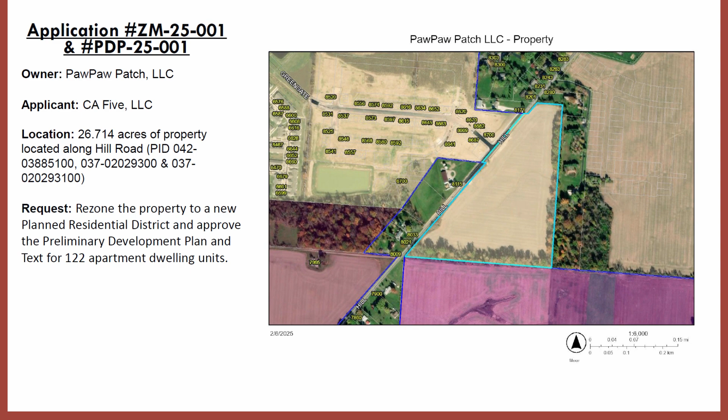So I'll go over those with the commission. As a brief reminder, this property is currently zoned PRD. It is part of an active development that was approved in 2001 for the Greengate Piper development tract.

This tract was originally approved for an assisted living facility and 44 independent detached condos. The applicant is requesting to rezone this property to allow 122 apartment dwelling units. This parcel is approximately 25 acres plus some right-of-way along Hill Road, totaling approximately 26.7 acres. Again, the applicant is requesting to rezone the site to a new PRD that allows for 122 apartment dwelling units.

When looking at the updated site plan, the applicant has not changed any of the conditions on the left-hand side for the breakdown of units. The number of units is still proposing the same 6.03 units per acre density, and is providing approximately 8.5 acres of open space, which nets to 34% of the overall development of the parcel.

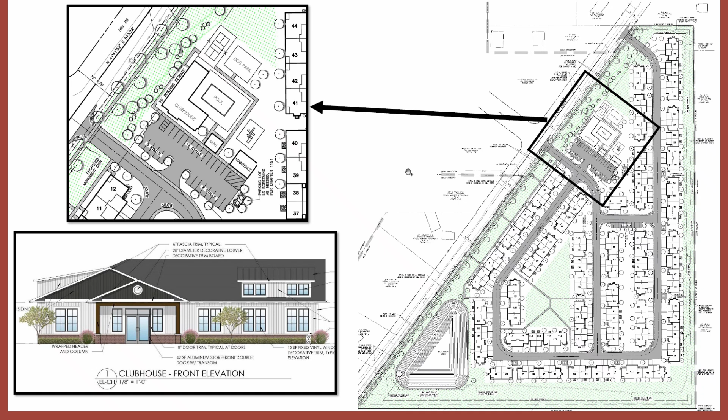When looking at the connectivity to the site, the applicant is proposing 2 full access drives to Hill Road. The southernmost access drive lines up with Greengate Boulevard on the opposite side of Hill Road. This access drive is the main entry in and out of the facility. To the north, a little more than 500 feet away, is a second full access drive that will primarily serve as a secondary access into the development.

The applicant has updated their plans based off feedback from our staff and the P&Z Commission. They are showing 5 sidewalk connections that lead to the Hill Road sidewalk path that they'll be constructing with this development.

Their development text does reflect all 5 connection points that will be made as part of this project. Additionally, some of the other comments from the commission was interconnectivity throughout the development. The applicant has added some more connectivity in the large central green to the site, helping residents in that area network and move around internally as well.

When looking at the development text, the applicant has committed to private streets with no on-street parking permitted. The roadways are designed to be 26 foot wide. Each unit has a 2-car attached garage, as well as a driveway that could handle 2 cars at 21 foot deep between the units and the private roadways. That is another change they made since last submittal, committing to the 21 foot driveway depth.

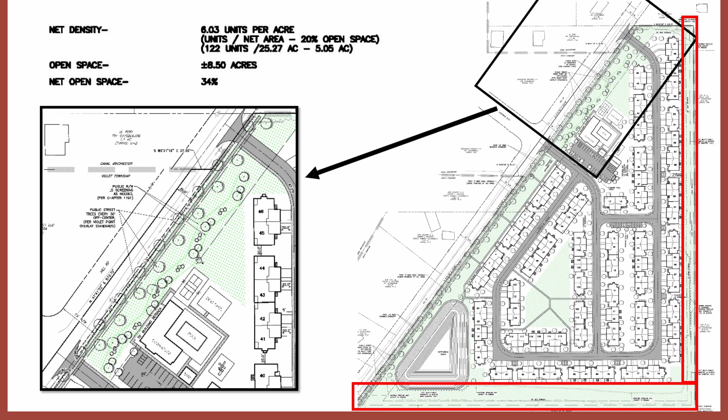When looking at the landscaping and open space, the applicant is committing to over 30% gross open space within the development. The existing tree lines to the east and south, outlined in red on this plan, are noted to be maintained, and the applicant has also committed to a landscape plan which includes some treatment along Hill Road to help screen portions of the development from the public right-of-way, as well as providing an updated landscape table which commits to planting approximately 449 trees on the site. That takes into account every single building, as well as all the parking lot impacts they're having within the facility.

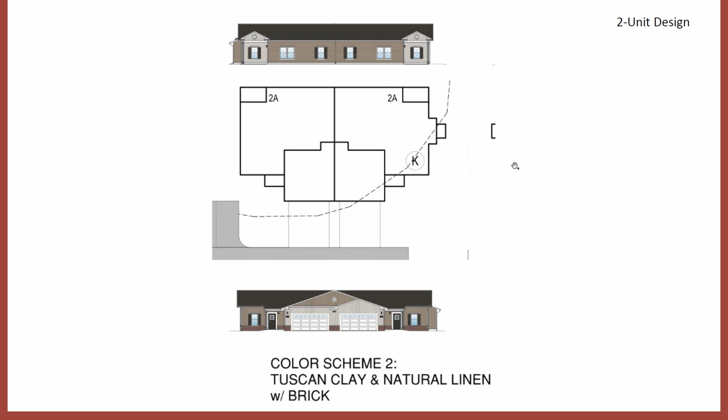The applicant has committed to special additional architectural commitments to the units that face Hill Road. Previously, they had 3 buildings, units 1 through 12, that faced Hill Road with additional architectural treatments, such as the covered patios with railings, and some elements with the stone water table.

Based on feedback from the Planning and Zoning Commission, the applicant has added units 89 through 94 - the unit that backs up to the pond - to have similar treatment to that design, and also units 45 and 46, a 2-unit building on the north side of the site. I didn't have a color elevation of that design to present this evening.

Looking at the development text, the applicant has provided a matrix for design elements committed to achieving their interpretation of the residential appearance standards, Chapter 1198. This includes building facade variation, siding color, separation, and glass panels required in the garage doors. The design itself has been revisited to adjust to the Planning and Zoning Commission's comments.

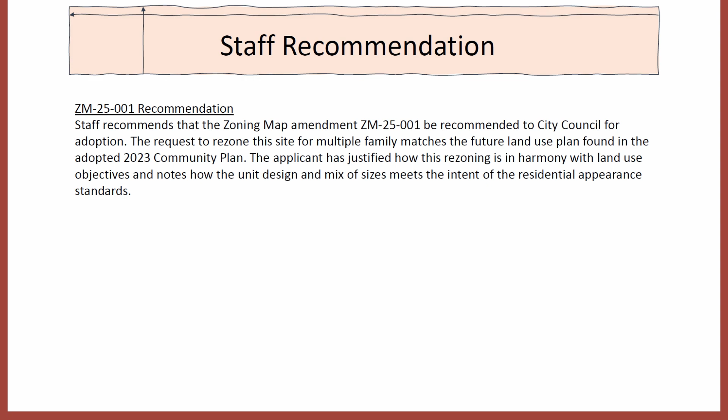The request to rezone the site for multifamily matches the future land use plan adopted in the 2023 community plan, and the applicant, with this revision, has justified how this rezoning is in harmony with land use objectives and notes how the unit design and mix of sizes meets the intent of the residential appearance standards.

Looking at the preliminary plan review basis, the applicant has noted that the proposed development is consistent with the purpose, intent, and standards of the zoning code. They've addressed all deviations requested and noted in their text how these deviations result in a better quality of development.

The preliminary development plan is in conformity with the 2023 community plan in terms of use, pedestrian connectivity, and meeting the residential appearance standards. The proposed development text provides concise information on setbacks, open space, roadway design, traffic, and other elements that contribute to an orderly development of land.

The preliminary development plan adequately identifies and justifies all modifications to the minimum development standards to promote a higher quality of development. This revised plan has increased pedestrian connectivity, which is promoted by the community plan, and the building design regulations have been enhanced to meet the intent of the community plan as well.

The preliminary development plan provides a mix of units ranging from one-bedroom to three-bedroom units, and also provides vertical interest by having all the six-unit buildings feature a two-story design in the center, which provides coordination and integration of individually designed buildings onto the property. So staff is recommending that the preliminary development plan 25001 also be recommended to City Council for adoption.

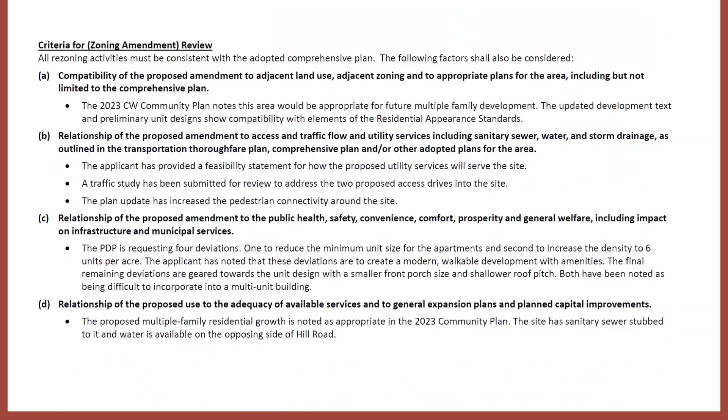So the traffic study's been ordered, or will be, at what phase? It's been reviewed by the city engineer, and they're in agreement with the study as provided. They did recommend that a left turn lane be provided going southbound for safety purposes, so you're not having offset left turns taking place. The county is still under review with the traffic study. Some revisions were resubmitted to them, and they're still reviewing that for the northern access point.

Is there a plan to improve that road? With a left turn lane for southbound traffic. Other than that, because it's more of a rural character than a thoroughfare type, there's no other improvements recommended in the traffic study. Is it on any of the transportation thoroughfare plans to improve the road? No, not beyond a 2-lane roadway. Not going to.

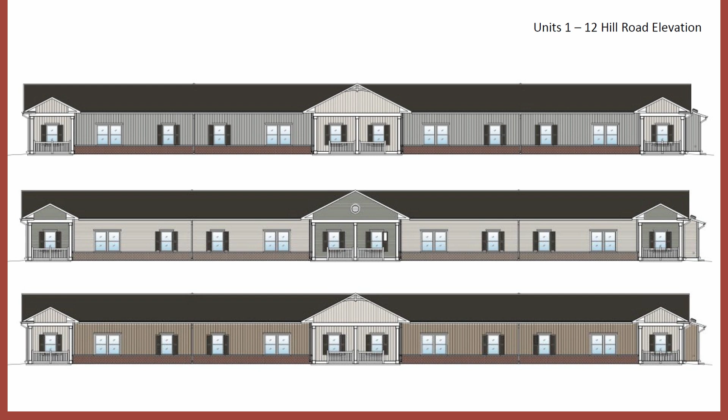For the vinyl sided requirements, there's a minimum of 2 additional enhancements, in which we're committing to provide at least 2, in some instances 3 enhancements. That's in addition to what we had spoken about last month regarding some additional rear wall and rear yard enhancements for the units close to Hill Road. I know we had talked last time as well about expanding that to include some other units close to Hill Road, if not exactly on it. So we've updated that to include 8 additional units that will have that heightened rear wall, rear yard, to give it a little bit more of an aesthetic view from the road.

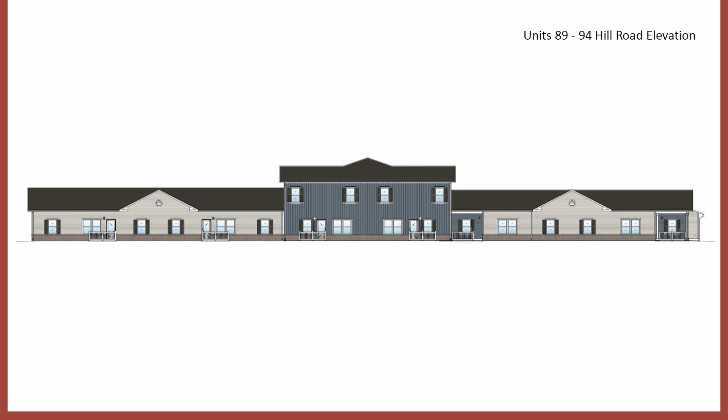So this way, when the new sidewalk is constructed, people walking or driving along Hill Road will see something that looks a little bit more like a front yard standard. Those were the changes we made there. Other changes include more internal sidewalks. I think the big one was language and detail added to the building facades to ensure that 2 buildings next to each other will not look the same or exactly the same. The way to accomplish that is a few different ways.

Included some language about the streets, I'd say critical there being the prohibition of on-street parking. This development has plenty of parking available. Each unit will have a 2-car garage, and in addition, a driveway that is a minimum of 21 feet, which helps alleviate concerns regarding cars in the driveway getting close to the sidewalk.

Other than that, we added a minimum building setback. One thing not in the text that we'd like to add, either by red line or by condition, is language pertaining to vinyl siding thickness. Chapter 1198 mentions a minimum thickness of 0.046 inches, and we're happy to commit to that standard. In addition, asphalt shingles should be the 25-year true shingle, minimum weight of 240 pounds per 100 square feet.

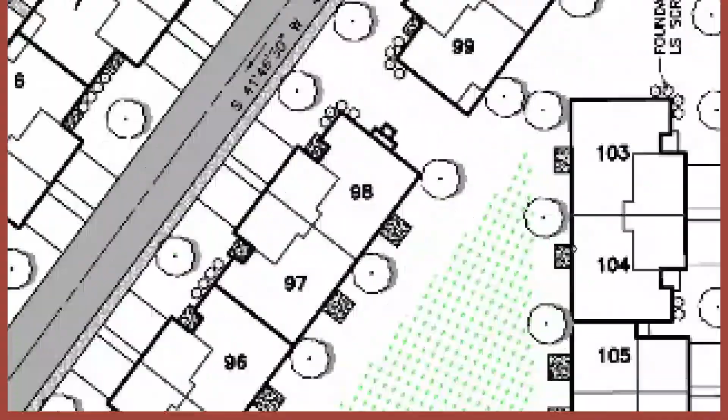Andrew, can you go to... let me zoom in for you here. Zoom back out here. Right, there's the sidewalk stubs on both ends.

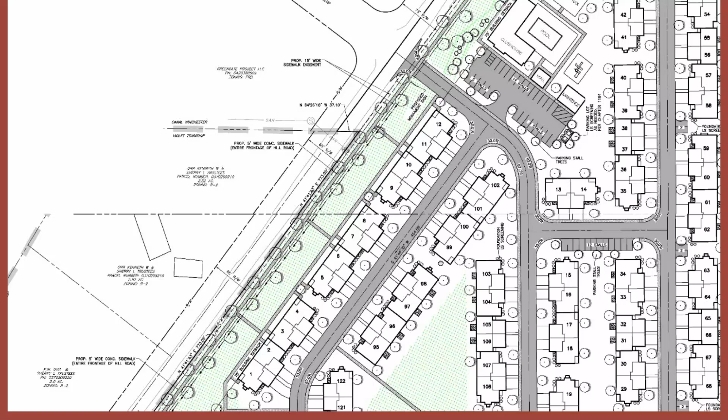I'd like to see that completed just to make it so you're not walking around a loop and then having to walk across the street to complete your walk. I really like what we've tried to do with the community plan to make things more accessible and walkable, and something like that's one of those easy things, just to connect the dots.

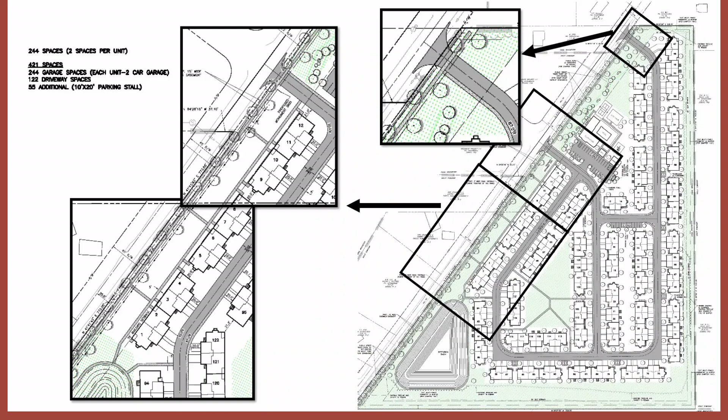Shall I continue? Please. Sorry, for some reason I just... it is a bit picky, but elevation D, I think it's the first one they show. Andrew, if you can get to that one. Which one? The two-story. Two-stories. There you go, that one.

So if you look at this one, it just looks really awkward. You look at some of the other two stories, and I think they actually have some appeal. So I don't know if it's just something as simple as trying to separate these or make them look like... but they just look like, oh well, we had some space, we better put a window there.

And this is probably, if you just flip to the one previous to that, I know we gave on the concession of the 4:12 pitch, but when you see rows of these like you do over in Redwood, to me it just looks like a pole barn. So I understand we gave on some of the concession for all of it being 6:12, but adding some 6:12s in here, I think would help break it up.

And you know, we talked about the vertical appeal. I just think this has... it doesn't, so. I think those are most of my pet peeves with this.

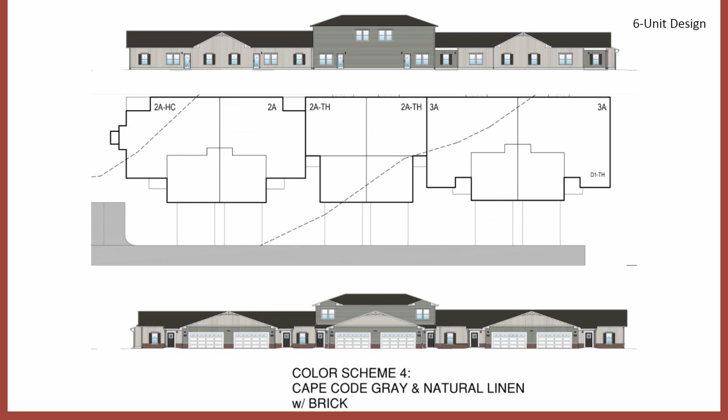So, thank you, Mr. Deeds. One of my questions was the pitch, because our conversation in the last meeting, I know we discussed that. So, question for the applicant, and this might be for staff too. I understand the deviation for density, or where we want to be on density, but the deviation around the front porch minimum from 5 feet, or from 7 feet to 10 feet, from 5 to 8, what's the rationale with that?

Just the unit redesign that we would need to go through. It's obviously not impossible to accomplish. It's just the man hours that would require just to make everything fit in there.

So man hours to have everything fit in there, and we're asking for a deviation to reduce front porch size, okay, so I appreciate that, so thank you. What's your feedback on the sidewalks not being on both sides of the road?

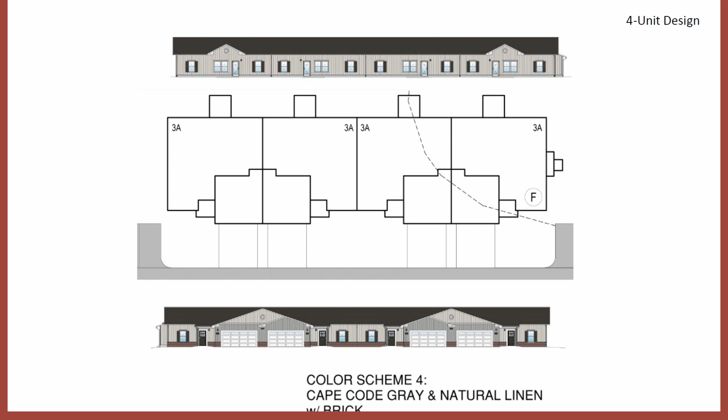The sidewalks not being on both sides of the road, there's a couple of reasons. One, the code just requires one side for private streets. We've been trying to model off the Redwood neighborhood, we know they've been extremely successful. We feel that having sidewalks on one side of the street still accomplishes the interconnectivity you're looking for, although maybe not 100% connectivity, because the site is going to be designed to be FHA compliant, meaning less than 5% driveway slopes, 2% roadway slopes. Crossing that street will not be a major challenge for anybody, especially somebody that's handicapped.

Okay. What other questions or comments for the applicant? Okay, thank you. Thank you.

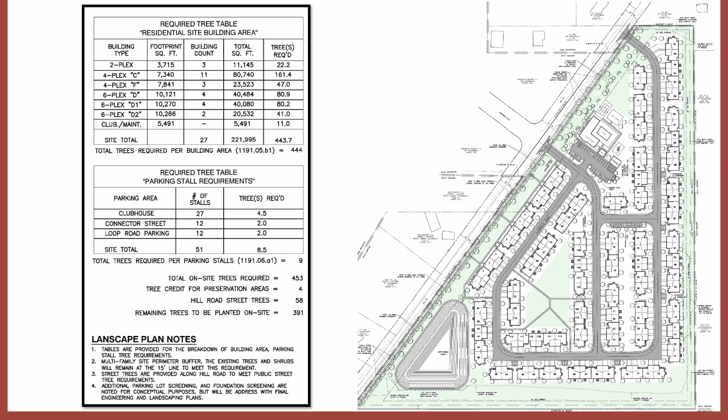So again, we have two applications here that we're speaking of interchangeably, but we will focus on the first one, which is ZM 25-001. So I will now open it up for public hearing.

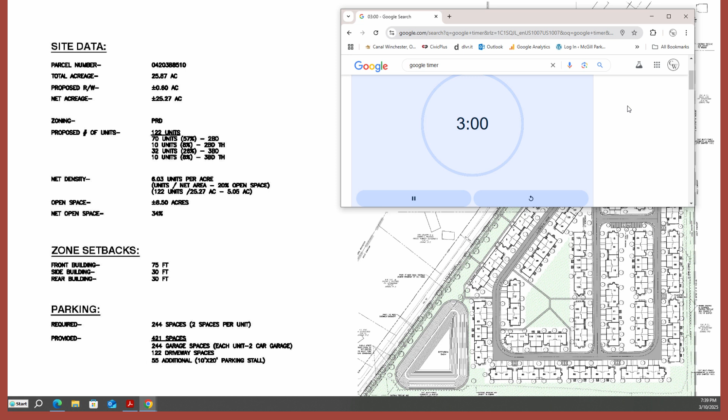Hello, my name's Kenny Orr. I live at 8115 Hill Road, between Busey and Kings Crossing. Better get my glasses out for this one.

The land in question used to be the Pifer family farm. I'm sure some of you folks know that. Ruth Pifer was a long resident of Canal Winchester, and she loved Canal Winchester. If you knew her, you knew she loved it.

I live on Hill Road. I bought my property from Ruth. Ruth loved this area so much, she took it upon herself to get the zoning done while she was still alive, because she cared about what happened to the old family farm that she loved so much. Her desire was for the land in question to be zoned what it currently is, assisted living.

Ruth cared so much for the land her family farm sat on, she even donated parkland. She didn't have to, but she did. It's over on Busey Road. She stopped by one day and wanted to know what I thought of the zoning that she had planned. Of course, I didn't have any problem with it. We understand that things have to change as time goes on.

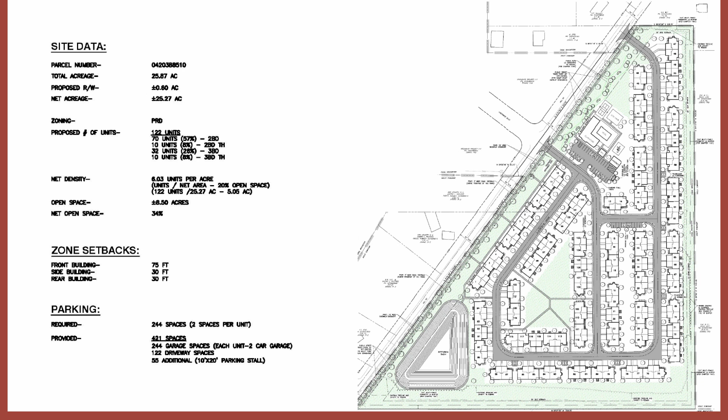Okay, so thank you. The question really is - because I heard the residents talk about promises that were made - they built their house, they bought their properties because they believed that assisted living was going to go in. But a deed restriction is the only legal way that could be promised, in my experience - is that correct? Yeah, zoning can always be changed, right, through this zoning process. It can always be changed, and what I've seen is it's always changed every 5 to 10 years anyway. I know this is really hard for the residents. I do listen to you, I did empathize with you.

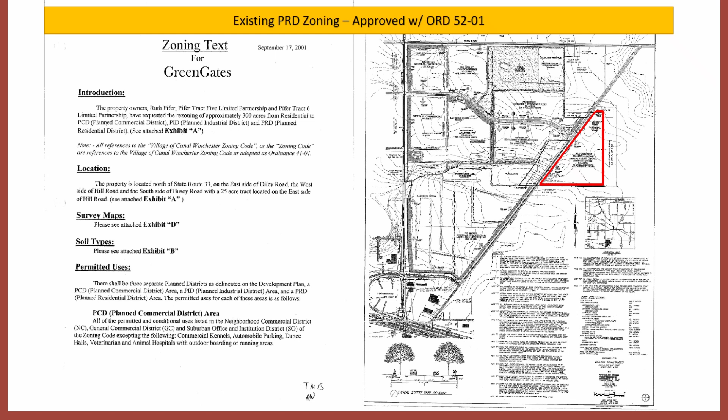The next thing I have - and I think it's a good question for the development - is really about the management of the property, because they have brought up several complaints about how properties decay, people don't take care of them, and the trash isn't picked up. I know that from personal experience. So what are your plans for management of the property?

Yeah, so currently our plans are to maintain long-term. We have 3 neighborhoods under construction currently with the same type of product across the nation - 2 in Florida, 1 in North Carolina - and we're investigating 10 to 12 more right now. So the plan is to maintain long-term. We have an on-site maintenance team that will be there daily, and a leasing team that will be there daily as well. One thing I'd like to point out is that if we are not maintaining our product, that's a negative - it's negative to us. Our goal is to lease these out and make money, and by not maintaining this, we simply won't be able to lease them.

People want to live in a nice neighborhood, and that's hopefully what we can provide for them. So will you have property maintenance and a leasing agent on staff? Yes. And will they be people residents can contact 24/7 if they're finding issues? Yes.